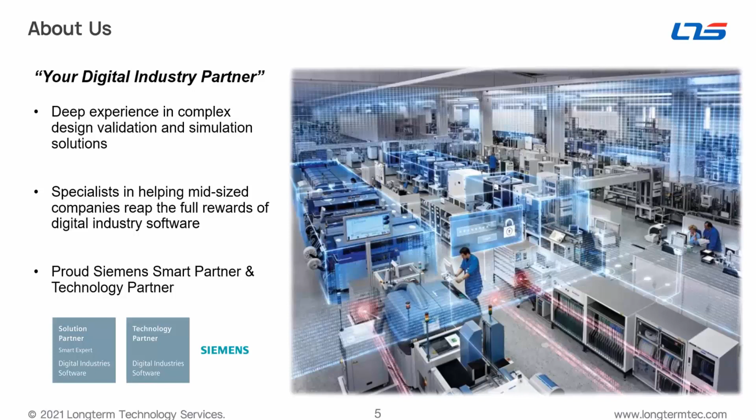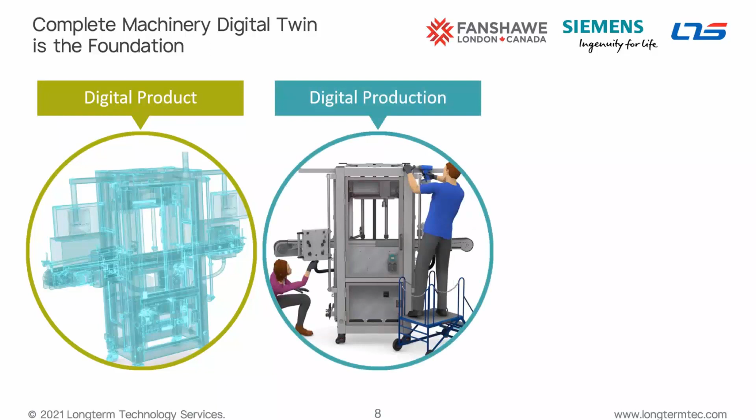So you might have heard the expression digital twin before. What do we really mean by this? Well, if you think of traditional simulation, you're usually thinking of a geometric or kinematic model that's pretty hypothetical—it's not the reality, in other words. But a digital twin is really a virtual replica of your product, machine, or, as we'll find out here, human being, that goes much deeper into different realms, especially when it comes to orthopedics and ergonomics with the human model we're talking about here.

On the machine side, you can get into the level of electrical, mechatronic, thermal transfer—pretty much any sort of real-world effects you can name, you can simulate those. So now you're talking about a type of simulation that truly offers a stand-in for a real device, object, or person that can also be connected to them in real time. In the case of machines, that would be sensors in many cases, and with the human, we're going to look at this today, but that would be motion capture technology. And that has big implications for the way we do things in manufacturing.

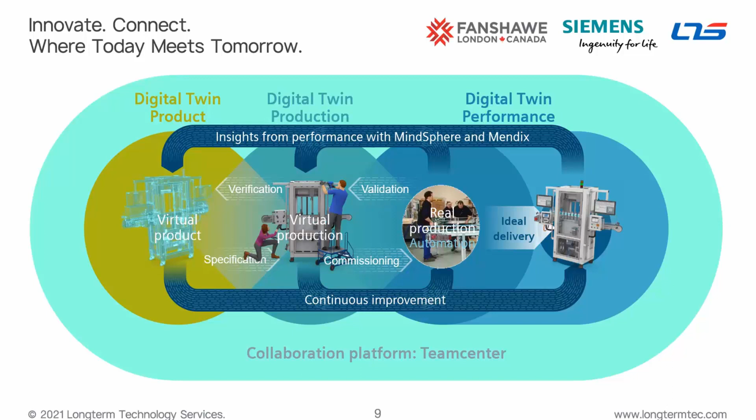And while this is all good for machines, today we're talking about extending this approach to the human body and ergonomic analysis. So how do you really capture all of that complexity of a flesh and blood human being? How do you model that at the level you would need to replicate or even surpass the value of doing those simulations with a real person?

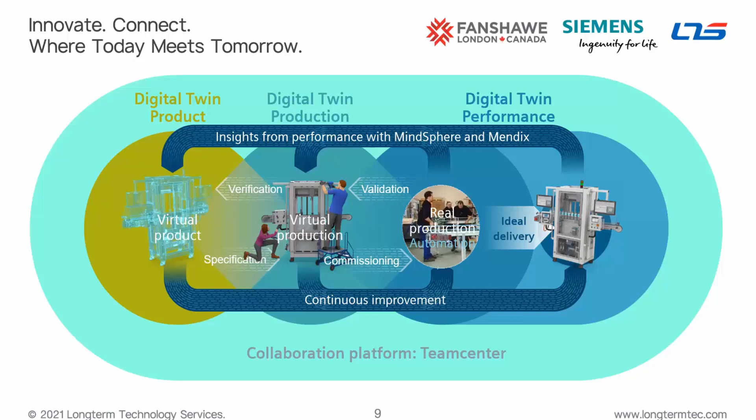Today that's really what this webinar is going to help you answer. It's this approach that allows you to take the performance of individual tasks and use reliable human models to standardize and scale those practices throughout your organization. So keep in mind that while creating human simulations might seem like a lot of work at times, you can compare that to the savings and improvements you'll make by using those simulations to standardize the performance of tasks.

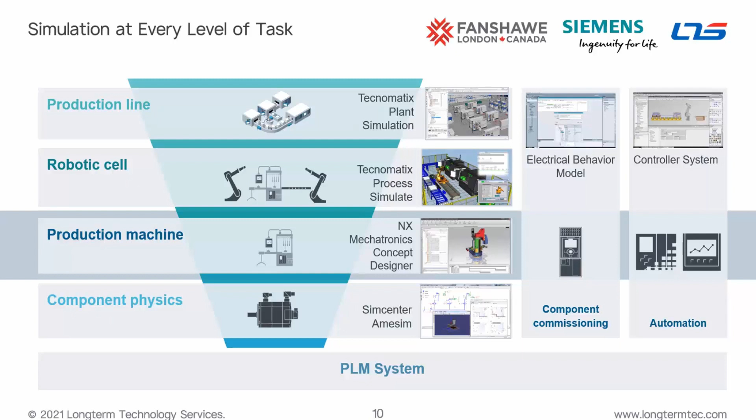And so once you've decided to work with digital twin technology, it then becomes a question of scope. If you've attended any of our previous webinars, you'll have seen that digital twin technology runs all the way from plant-level simulation down to the level of the production line, robotic work cells, or robot station. For this webinar, we're focusing on a very special area, which is the level of the human body, but it does use many of the same digital twinning principles that we apply to these other layers.

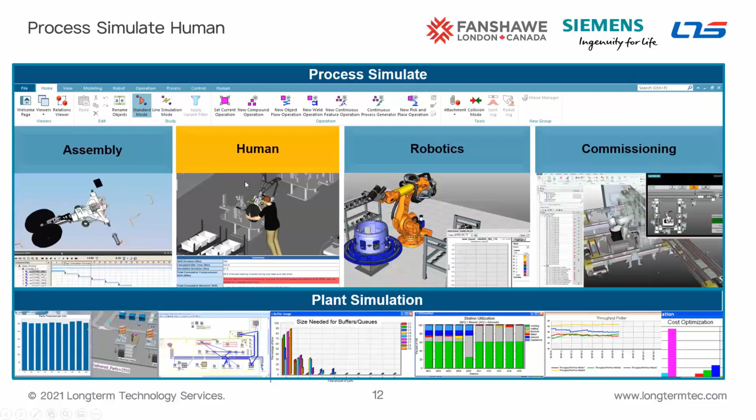So the Process Simulate Human tool includes this 3D digital human. It allows you to populate your designs or work areas with this digital human to assess your product, your processes, or your facility layout. It allows you to virtually explore the advantages or disadvantages of different designs or layouts within a work cell without the need for an actual physical prototype. So this can all be done up front virtually.

We can simulate different loading conditions as well, like whether they're lifting, pushing, or pulling. So we can look at the force and the direction of the force, and then analyze the injury risk to the human. And then once a simulation is built, you also get a timing report that will give you an estimate for each task and the overall cycle time as well.

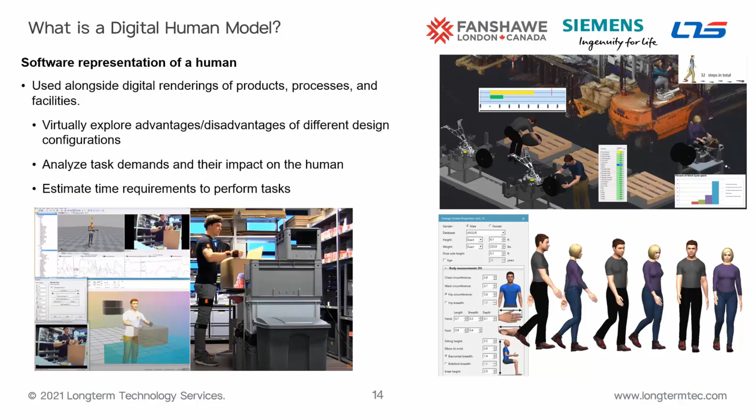So in some of the movie files you'll see a little later in this presentation, you'll see our older mannequins. In these slides here, though, you're going to see our latest generation of mannequins. We have spent several years working on these new figures. Two key changes are they're totally textured from head to toe, making them look visually very realistic, and the anthropometric scaling has also been revised. One limitation in the past was you didn't have as much control of the individual body areas and their size. Now we have detailed control over the individual body scaling, like the chest and waist circumference, the different breadths. So we can really represent realistically a very wide variety of body shapes.

And as always, we've had many different global anthropometric databases, so you can accurately portray your target demographic. They're listed over here. The mannequins also have a fully articulated spine, shoulder, and hand. They're kinematically accurate, with a physiological range of motion limits built into the model, so it doesn't allow you to bend the wrist back too far or turn the neck too far. So it allows for very accurate ergonomic assessments.

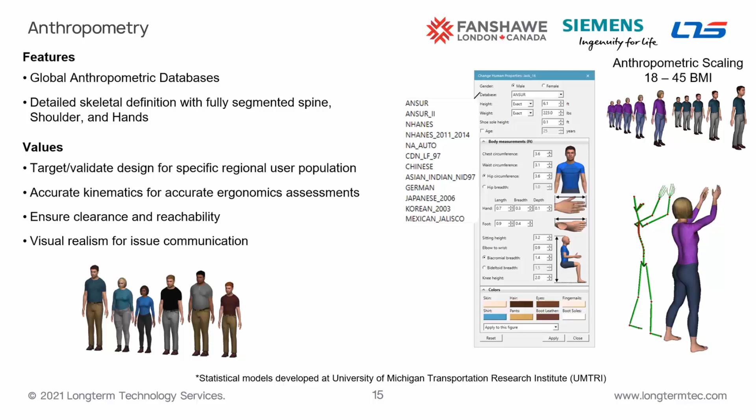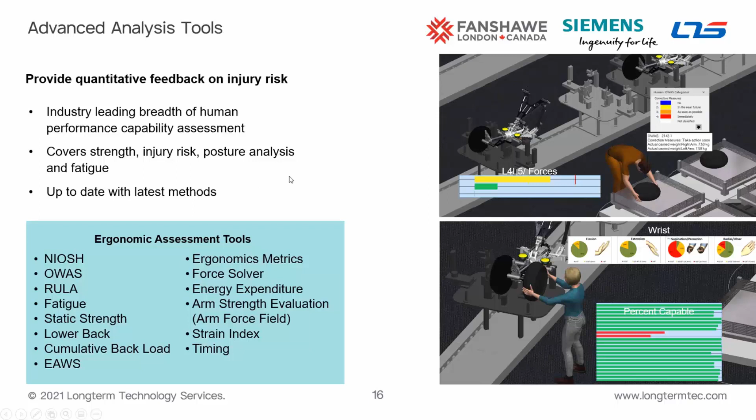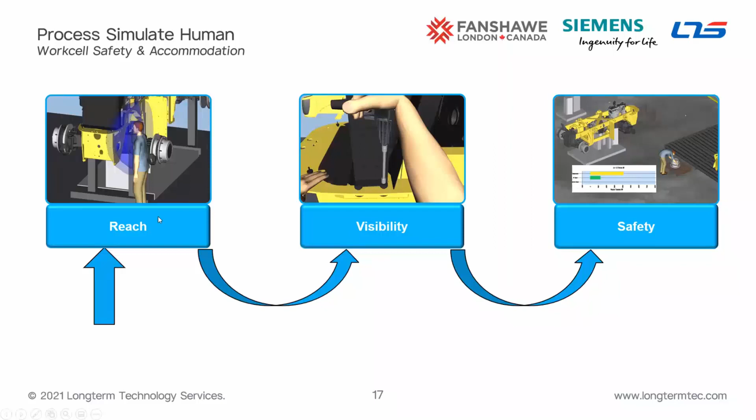Now I'm going to go through three demonstrations of how to use our tools in these areas: doing a reachability study, a visibility study, and also safety.

So you can see this is a different looking mannequin, the previous generation. This is going to be a reach assessment. We have the ability to change the gender of the individual, and different options here. We can even put in a boot and glove figure.

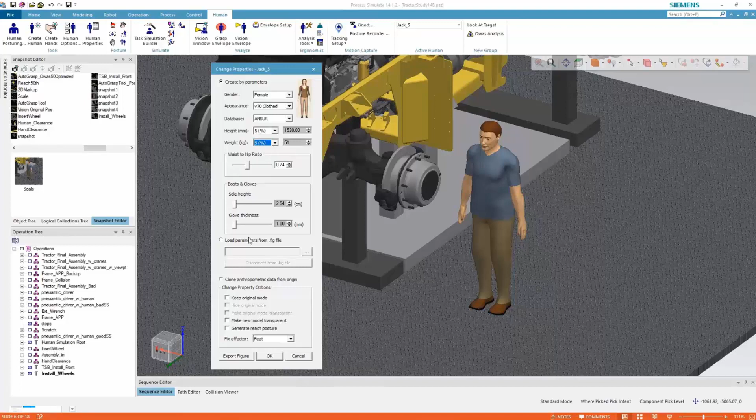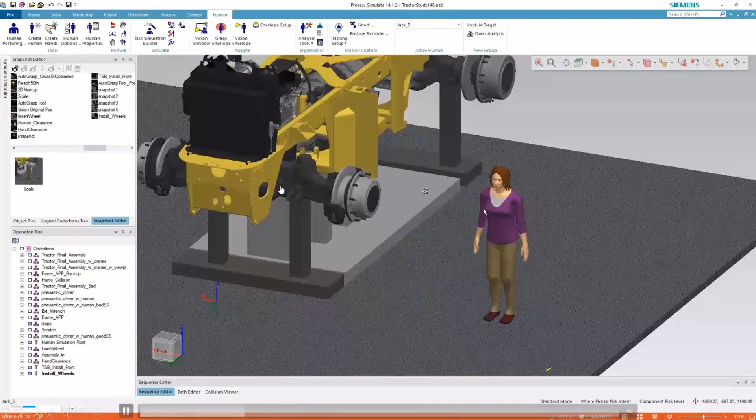We can choose from all of these different anthropometric databases to properly represent your target population. This is a US database, and we're going to put in a 5th percentile female. Since this is a reach study, we'll look at the smaller end of the spectrum. You can see the size difference between a 50th percentile male and this 5th percentile female. We're going to see if she can reach this tool over here. Just by looking at the person relative to the tool, you can see that's not ideal.

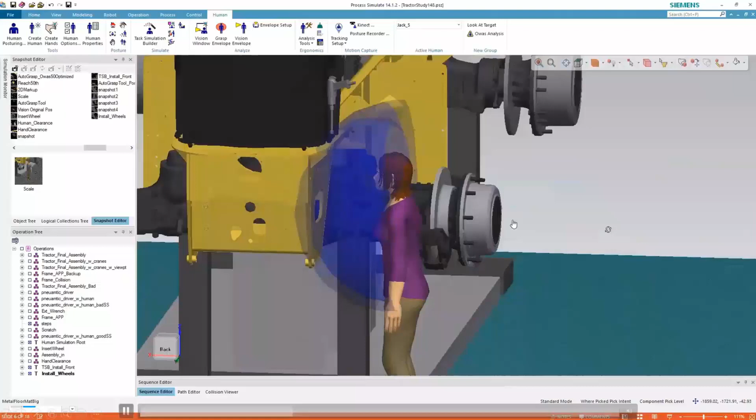But we can also use this tool to make recommendations, like if she needs a platform or riser, how high does that need to be? It allows us to do a number of what-if studies with the layout. This is just a quick reach envelope, everything she can reach with the palm of the hand, and you can see it doesn't encompass the tool. Not all jobs can be changed, so we may have to recommend that a certain size person do a job. This can help with staffing requirements as well.

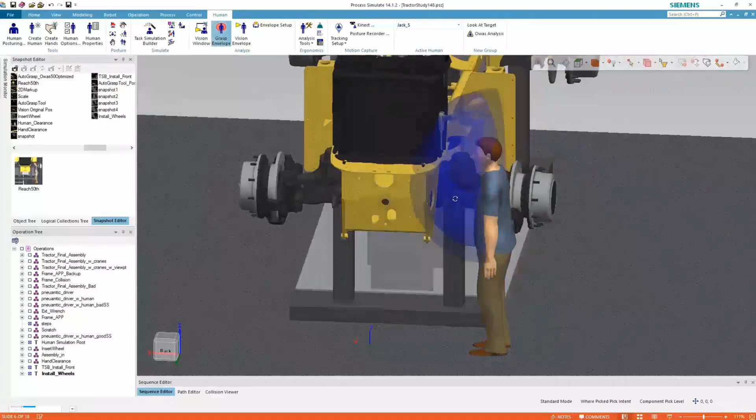So we're going to quickly populate that same area with a 50th percentile male. You can see the reach envelope does encompass the tool, but it's at the high end of the reach zone. At this point we would go a step further and actually posture the person in to see what that posture looked like.

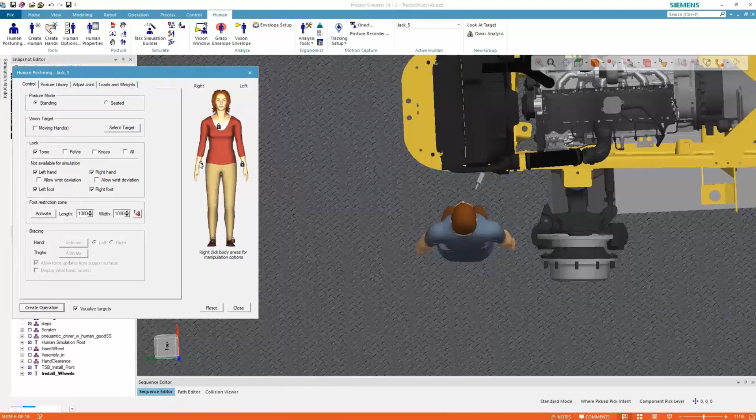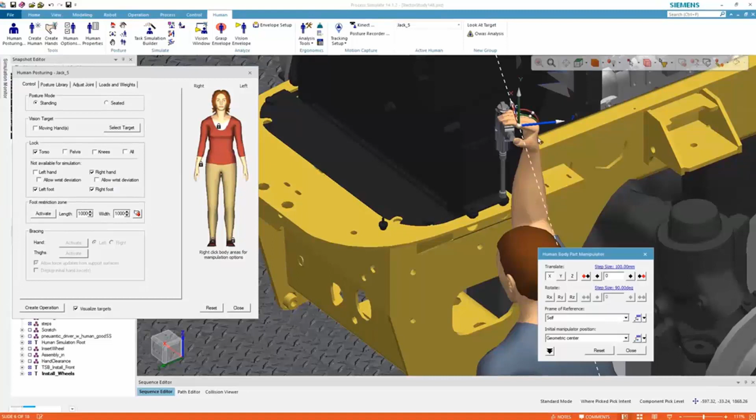We do have these quick, easy posture prediction tools. It considers the weight of the object and any bracing surfaces. In this case, all we have to do is grab the right hand and tell it to grasp the side of that tool, and it will automatically calculate the posture. It even curls the fingers around the object using collision detection algorithms. If I adjust the grasp a little, you'll see it recurl the fingers around the object.

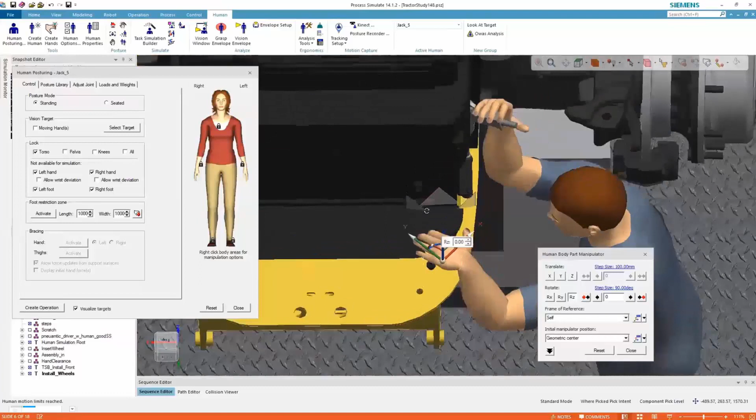Just by looking at the posture here, in a second you'll see it from more of a side view. You can tell this isn't ideal just from visually seeing the person in the posture, with the elbow a bit ahead of or above the shoulder. But if I want quantitative data, I can turn on one of the analysis tools that looks at the overall posture and whether it's comfortable to the operator.

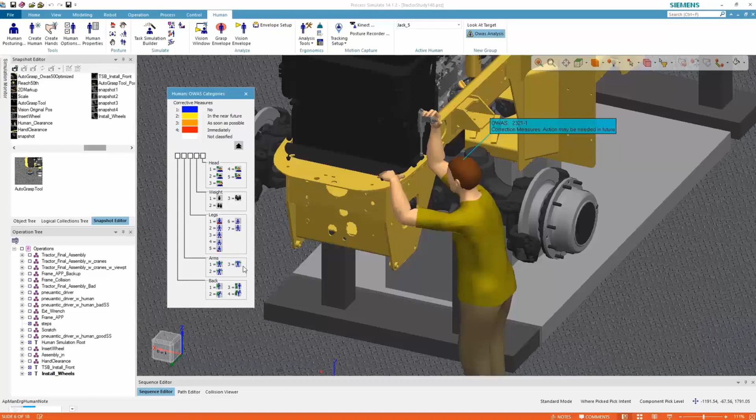So I'm going to turn on the OWAS tool. You can see the back and the arm turning yellow, with the highest number for the arms, and there's also a bit of a warning in the back. So it's telling us this isn't an ideal posture, especially if this is something he has to do over the course of the workday, as opposed to just a one-time task.

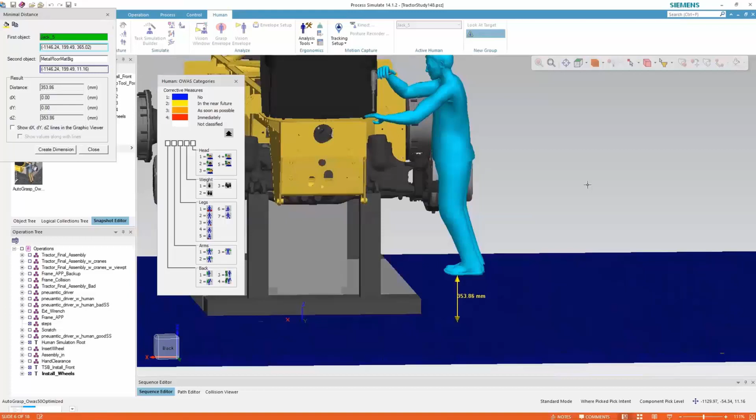So if I move him up, you can see that automatically corrected the posture. We're seeing no corrective actions necessary, and I can see how far I had to move him up. So we need to put a platform of at least 350 or so millimeters to make it acceptable, and we can provide that input to the person doing the layout.

Okay, we can also look at visibility studies. So we're going to start out in that original configuration with the feet on the floor there.

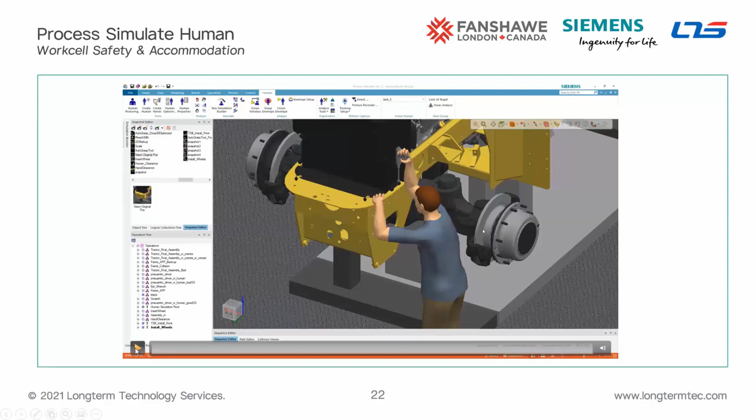And we're going to direct the line of sight towards those hole locations that he's trying to fasten. What you see there are vision envelopes, so those are the areas of forward vision, the areas that would be the most visually acute.

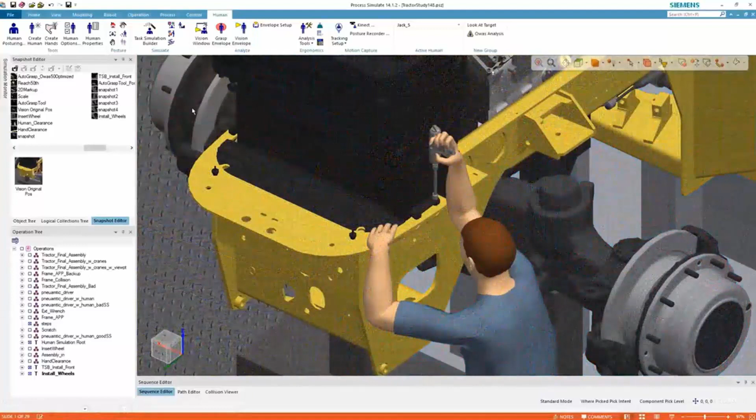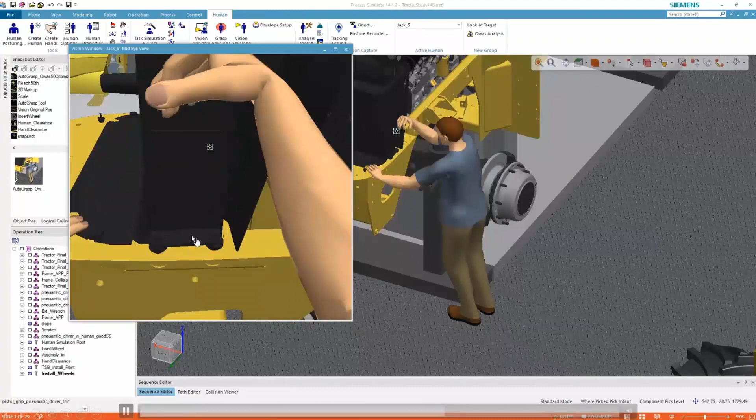So you can see those holes are within that area, but what we don't know is how well he could see up and into those holes. For that, we can actually open this eye view window and see right through the mannequin's eyes. You can see if I turn the part and highlight it, it's very difficult to see the actual hole because he's a little underneath where he needs to be. So if I move him up to that optimized location, not only does it make the posture better, but now he can kind of see up and into those holes. It's much less of a blind operation, and he can see what he needs to do.

And next, we're going to look at safety.

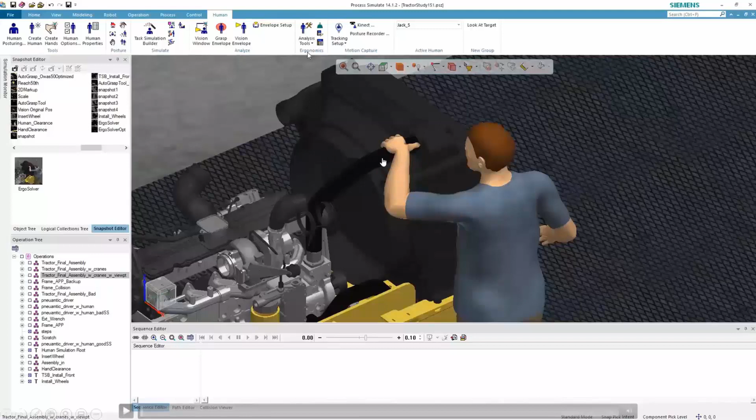So here we're doing a hose installation, and I'm just going to do a quick static study here. I'm going to provide some feedback into engineering or design on how much force he's capable of exerting. So I'm going to open the force solver tool, and with that left hand in this current posture, we're going to make the force in the horizontal direction, since he's going to be pushing it in. I'm going to solve for how much force he can exert, and make the percent capable acceptable to 90% of the male population. You can see the limiting body element was the wrist, and he can handle about 9.1 kilograms of force.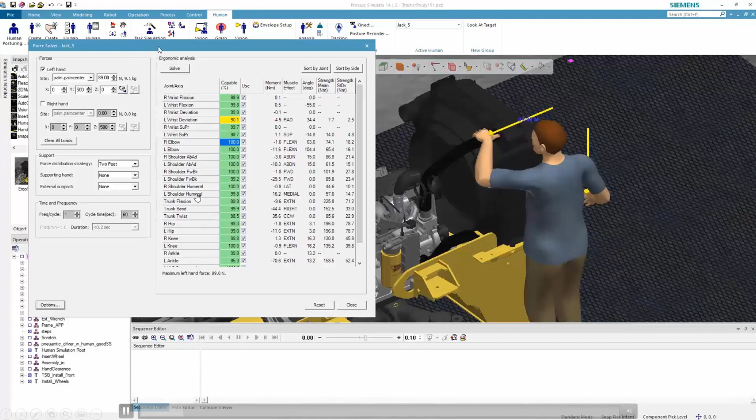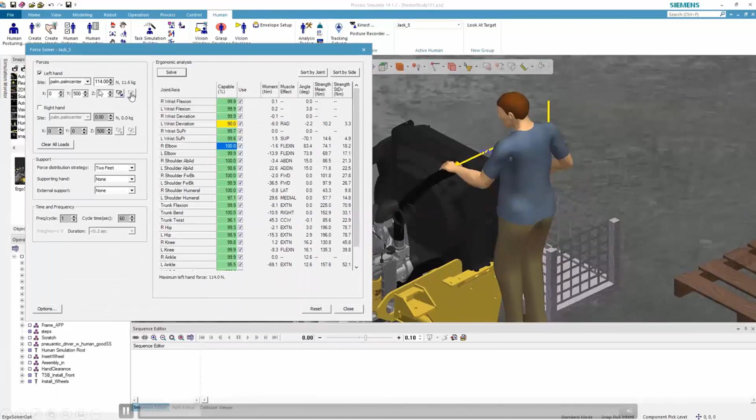So if that required force is greater than what he's capable of, we may look at changing the posture. I raised him up a little bit so he was at a more optimal posture, with the arm in a much more neutral position. Now I can resolve for that, and it'll go from 9.1 kilograms to 11.6 kilograms. So now he can handle the required force just by giving him better access to the parts.

And next we're looking at an actual simulation. He's going to take this first wheel. The weight of that object is 8 kilograms, and anytime he is interacting with that object, it's going to assume that he's carrying that 8 kilograms. Then at the point in time where he has to push it onto the fixture, it requires 100 newtons of force.

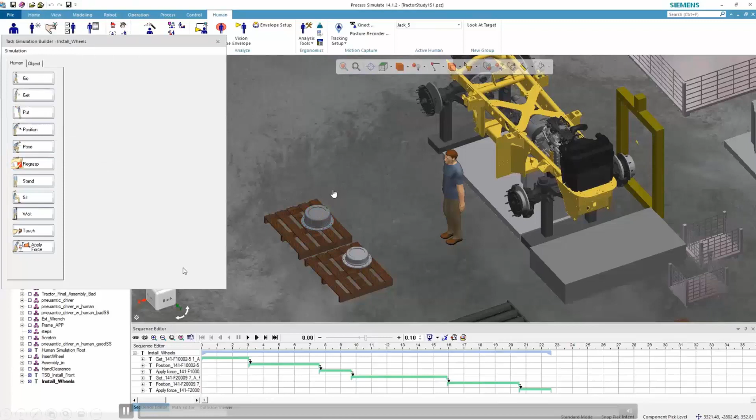And the second part there, I think, was 10 kilograms, and again required 100 newtons of force to push it onto the fixture. So I'm going to activate different ergonomic reports here, display some notes, and then we'll run detailed reports after that.

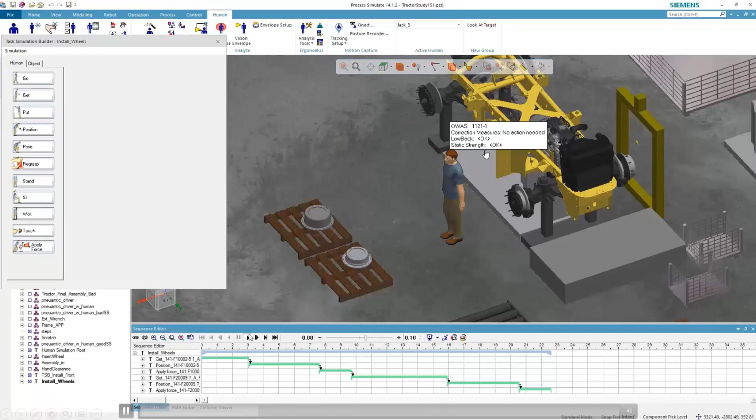So you can see some notes here, and as we run the simulation, you'll see these notes change. You see the body turn orange - that was the OWAS tool saying that he was in a bad posture. Now it's turning yellow. And as he goes back to pick up this other object, you may be able to see the low back tool flagging that he's beyond the NIOSH recommended limits for low back injury risk.

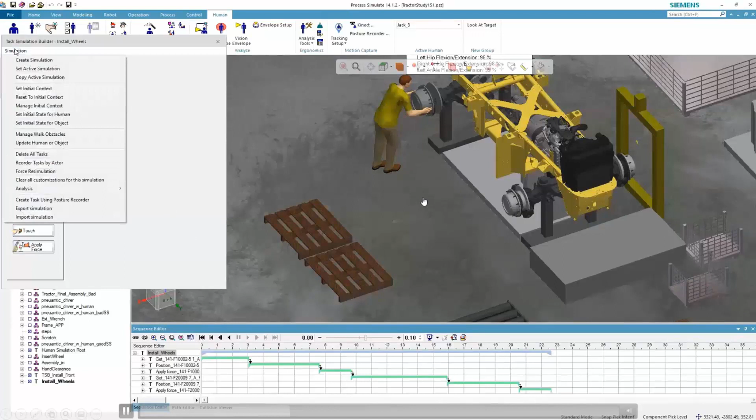So you can get really quick updated information that way, and then we can activate some actual ergonomic reports to give us the real nuts and bolts of what's going on in this simulation. It's looking at the posture he is in for every frame of this animation, the gender of the person, and also the loading conditions.

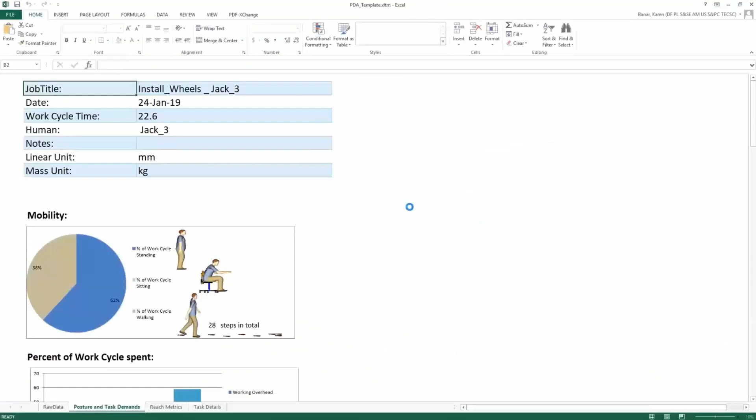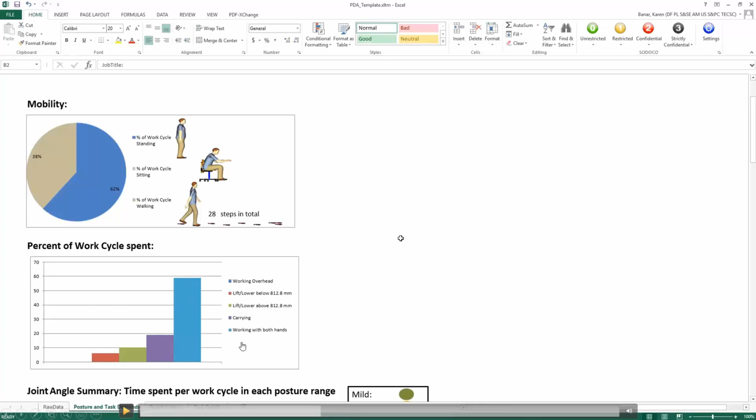So we're first going to look at the ergonomic metrics report here, and this tells us what percentage of time in that cycle he spent either standing, sitting, or walking. It tells us how many steps are in that cycle. It also tells us how much time is spent, or the percentage of work time spent working overhead, lifting above or below what's considered waist height, when he's carrying an object, or working with both hands. This could be useful for return to work initiatives.

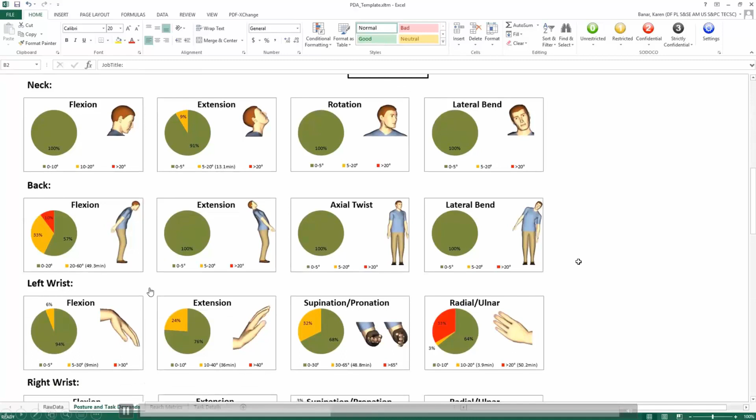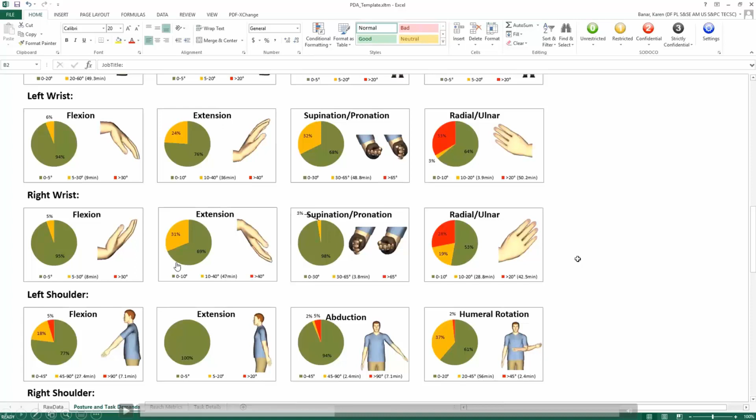And then we also get a physical demands report down here, which tells us when we are in either a mild, moderate, or significant posture range. You can see the wrist here - we're in a significant posture range for quite a bit of the cycle due to the fact that he has to pick that part up off the pallet and then turn it 90 degrees to put it on the fixture. You'll also see a little bit of shoulder issues here too, with a significant amount of time spent in shoulder issues.

We can also look at something that speaks more to efficiency - how many close, moderate, or far reaches there were. So if we're looking to shave time off of that cycle, we can very quickly see that we didn't have any close or moderate reaches; they were all far reaches. We can also look at what tasks required the most hand travel distance. In this case, it was going in and picking those parts up off of the pallet - that was the most hand travel distance. So reducing these can reduce some of the cycle time.

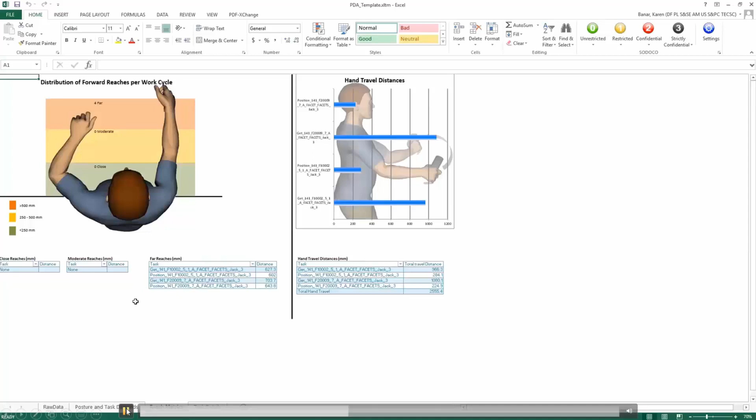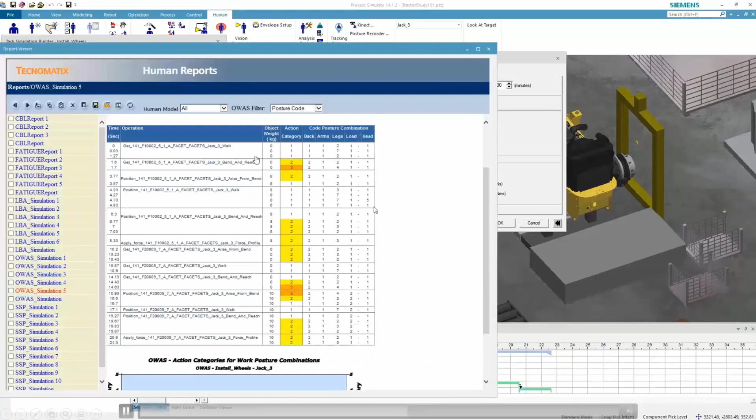We also have a tool that looks at the cumulative effects of loading. Before that, we're going to look at the OWAS tool again. So not only can you do that in a static mode, but we can also look at it over the course of the simulation. Same as the other tools, it's definitely flagging the points in time where he's walking over and picking the parts up off the pallet.

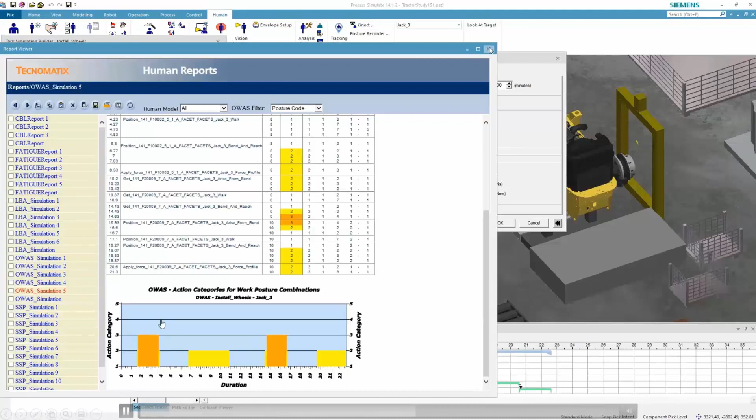This final report allows you to put in a shift duration and the repetitions per shift. So it allows you to see the cumulative effects of low back loading. If he does this 200 times, it's telling us that it's red, so the compression exposure exceeded the recommended threshold value.

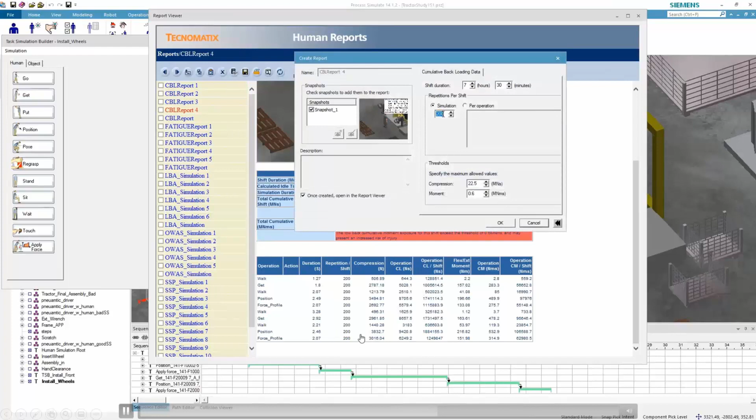I can look at editing the repetitions. If I change this to 150, you can see it starts to go green now because we've allowed enough rest time in the cycle to make this more acceptable. But what we would want to do is probably look at modifying that task to make it a little more acceptable for the operator.

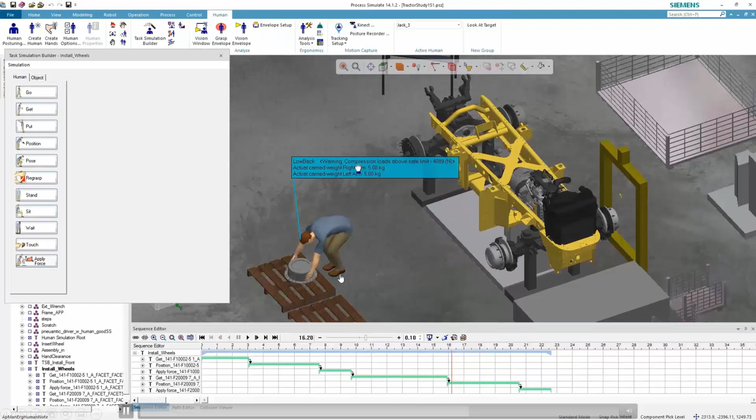So this is when we can use these notes, they come in handy. I can start to iterate it forward until the compression goes to an acceptable level. And now we can measure what the lift height is, or what the lift height should be. So we can provide some feedback on a minimum lift height for those parts to reduce injury risk for the operator.

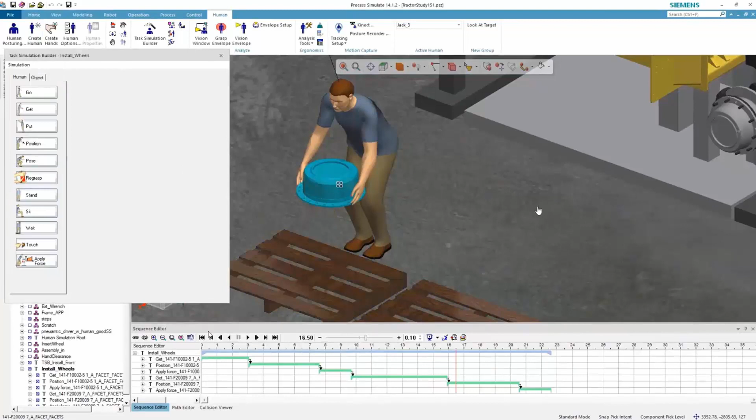Okay, and then usually I go through and show the female model as well. I can quickly switch over and morph the simulation, and the female model will run the same motions through as the male did. But for the sake of time, I'm going to speed through that part and show the last report.

Here's the timing report. This shows the overall cycle time, which was 22.4 seconds, and it takes each task and breaks them up into a series of subtasks. To get that first part, they had to walk a certain distance, and it automatically calculates that distance and assigns a time to it based on MTM1 codes. Then he had to turn, bend, and reach. Again, it automatically calculates the reach distances and assigns the duration, then gives you an overall time for the task and the cycle as well.

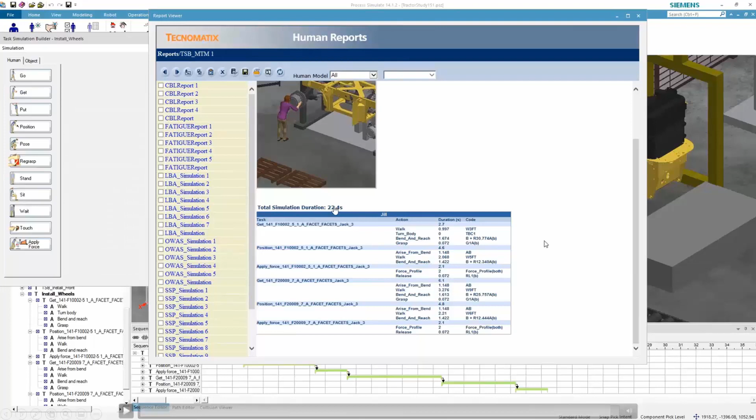These types of studies can help determine your staffing requirements, improve quality, and detect all these different types of assembly or layout issues early before everything is laid out on the shop floor. We can help decrease time by reducing the number of blind operations or visibility issues, and of course ensure the safety of workers, reduce workers' comp claims and medical expenses, and improve productivity.

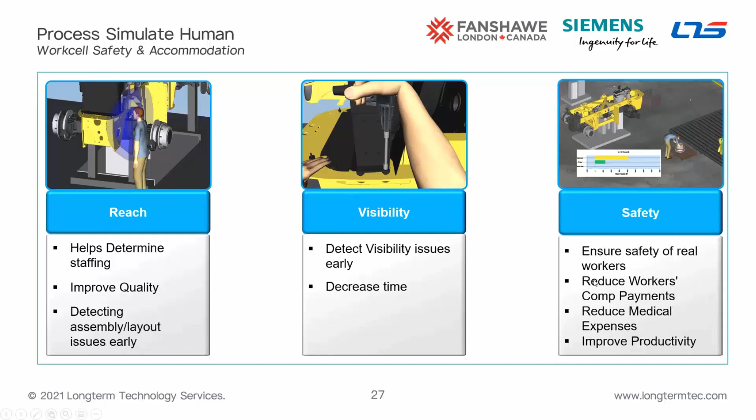This is my last slide here. What you saw in those three examples was creating all of those simulations manually. We have a task-based simulation builder that allows, it's kind of a wizard-based approach to simulation. You'll say get object and he'll automatically walk over and put the hands on the object.

So those were all created manually, but we can also connect to motion tracking hardware, and then the real person wearing the motion capture suit will actually drive the movements of the jack mannequin here. So we can very rapidly do these what-if studies, accurately get human motions in either real time or play them back later and process simulate human for analysis.

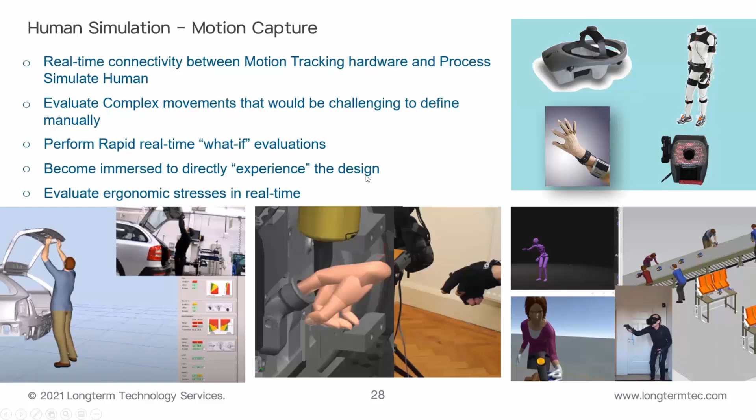So that was my last slide. Back to you, Philip.